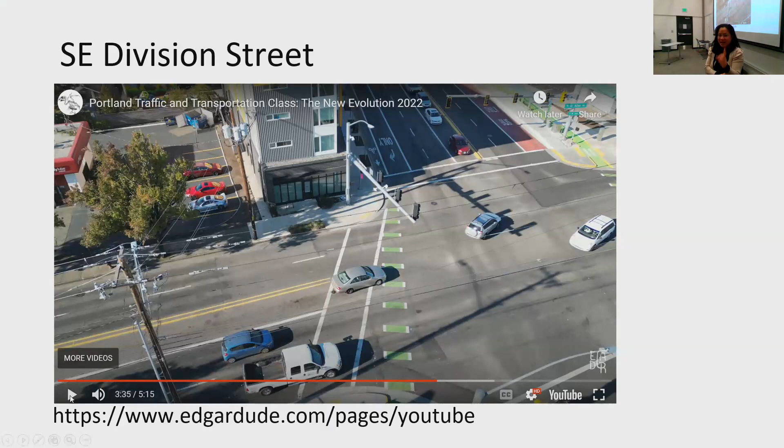If you go to the next one, I want to do a quick scan of a video - can you bring this up? This was a field trip that we did last year out. We did a walk for 82nd Avenue. If you can bring up the video, yeah, and then we'll just show you.

Show you at this point what the vision looks like. That was a very cool day.

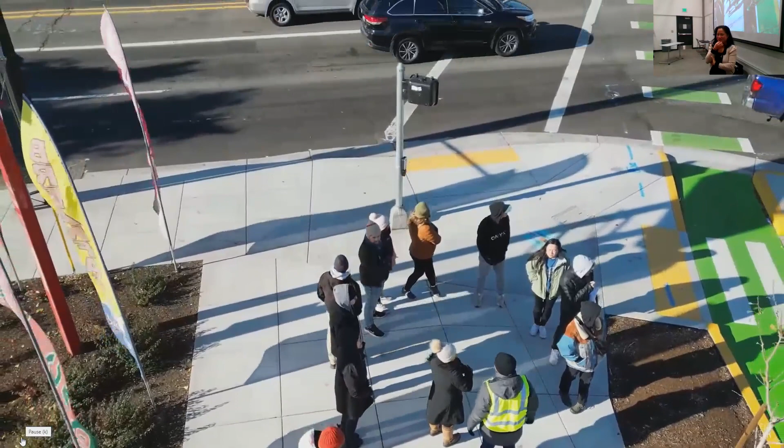So this was one of our students, this was our class last year. I asked for his permission, of course, but this lives on Edgar's website, and I just thought it was really pleasant there.

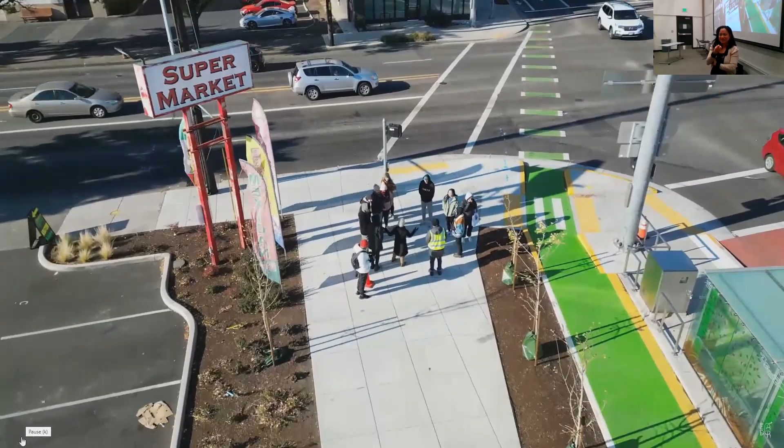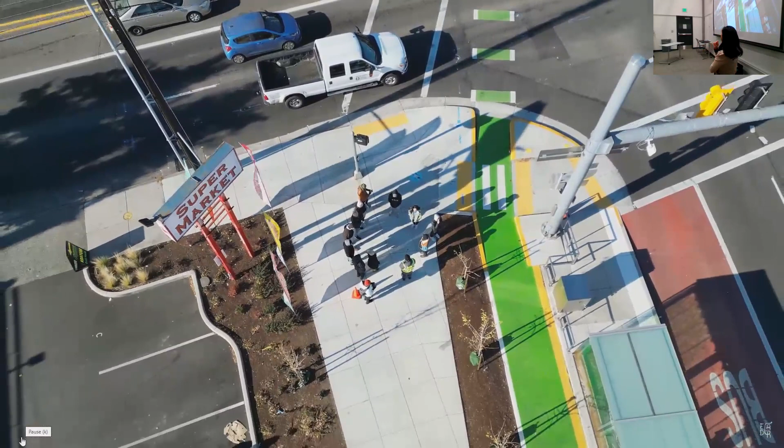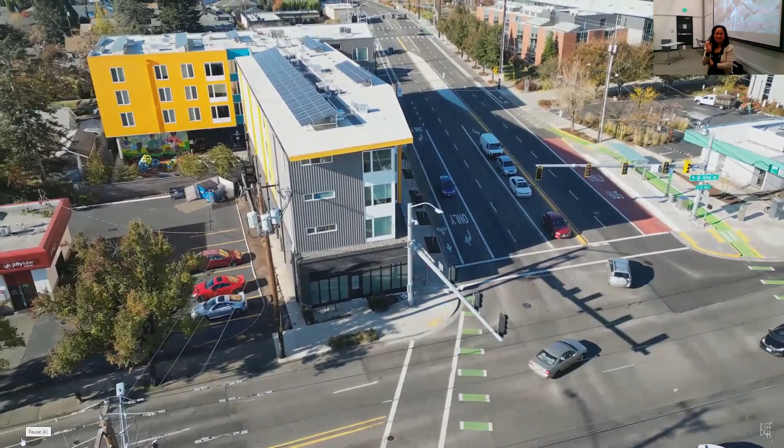So we're not doing that this year, but you got a glimpse of what we did last year on our walk. So with that, I'm gonna bring up my colleague, Marisa, and she's gonna talk about some engineering principles.

Hi, there we go. Yes, thank you. I really admire people who take night classes. I admire it more when I get here because I realize I no longer possess the energy to be out past work night.

Marisa, yes, if you present from here, we have a microphone here, so it'll be easier for people. Do you mind if I stand very close to you? Yeah, please. Okay, great. I'll stand very close to you.

So a little bit about me. I've been a traffic engineer for 8 years, 9 years technically in the field. One of those years I was the equity and inclusion manager for PBOT, which is where I work closely with Lisa Strader, and I'm very happy that we have her and her ADA expertise. People don't often associate ADA and equity together, but in fact, we are one and the same.

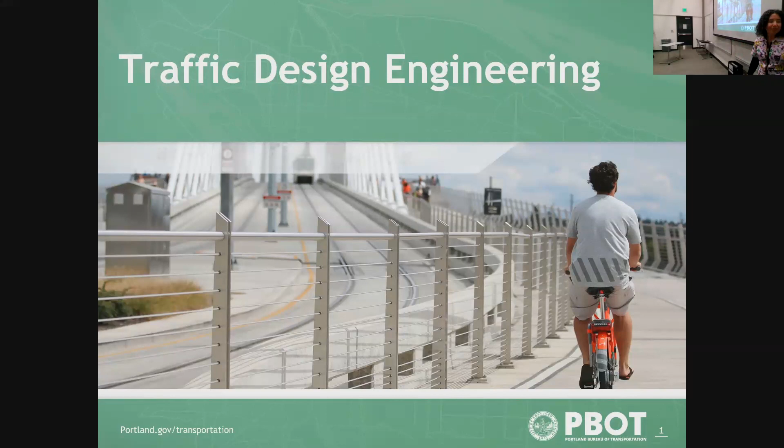All right, so traffic engineering. I chose this really nice part of Southwest, and folks know it - you get to see the highway, you get to see the streetcar that comes through here, we have some beautiful bike lanes that are new so it looks really shiny. This is a nice kind of encapsulation of really the broad variety of things that you work on when you're a traffic engineer at the city of Portland.

So we focus on the safe and efficient movement of people and goods. That's kind of your classic definition of what a traffic engineer does. Traffic design is a subset of traffic engineering in that we literally design the roads, like we design the signals, and we're going to go through those assets here. That's actually what we're going to be talking about.

The cool part about traffic design engineering, I think, is that it is really part psychology and part design engineering. In order to be a really good traffic design engineer, especially at a place like PBOT, you really have to understand what motivates people, how we can gently manipulate them into doing the thing that we want them to do. And then you also really have to have a deep bench of knowledge of all of the levers and tools and guidance and manuals that are available to help you pull those levers.

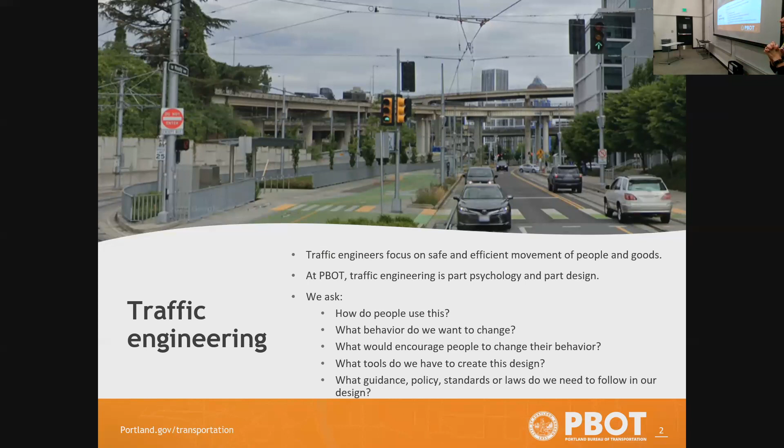All right, next slide. Let's start talking about our assets. One of the things we don't think about a lot is that civil engineering is like 99% invisible to most people by design, right? It's something you should experience every day but not think about.

Pavement markings are kind of the bread and butter of what I do. In the most basic sense, it is the way in which we split our modes. So we delineate, this is where the right turn is, this is where the bike goes, this is where vehicles move through, right? Or take a left. This is where pedestrians go, maybe if we put a pedestrian walkway in the streets.

In a more romanticized way, this is our basic tool we have for helping people to make the right decision at any given intersection or any given segment of road.

And we do that through a variety of ways, like our crosswalks, our green paint, right? But also some of the real basic things are the way that we dash our streets, which will indicate to you whether or not you can merge, whether or not you can pass, if there's a bike lane present, right? So these are all the subtle but basic tools of what traffic design looks like at the City of Portland.

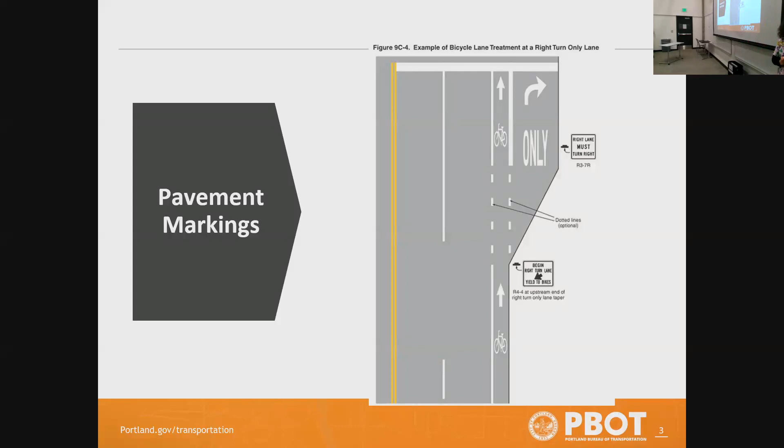The second highest-use thing that we do everywhere is permanent traffic control signs, not to be confused with temporary traffic control signs—those are the things we put up during construction. They're often orange and say bikes in roadway, or construction ahead, or whatever they might say for that particular use.

We have some really common permanent traffic control signs like your stop signs and yield signs, and some more uncommon traffic signs like no turn on red from this lane, which we may only use in one really specific circumstance. But because of that very specific circumstance, the Manual on Uniform Traffic Control Devices, which is the Bible of signals, street lighting, pavement markings, and traffic control signs, has put it in there under R10-11D.

So any state you go in, that's what it's going to be—this is our federal guidance. It's likely for those places where you have a dual right turn, and maybe in the middle lane we don't want you to take a right from there onward, right? So some very specific circumstance came up, and it was common enough across states that they decided to make a federal rule.

Here in PBOT, we have a ton of signs that are just ours, which you will know if you've operated a vehicle of any type in the City of Portland and have operated it anywhere else. We have a really specific way that we like to do our transportation design. Some signs that have ended up in the MUTCD came from things PBOT has piloted, and some of our signs are not in the MUTCD, and that is great too—that's again the Manual on Uniform Traffic Control Devices, so we say MUTCD.

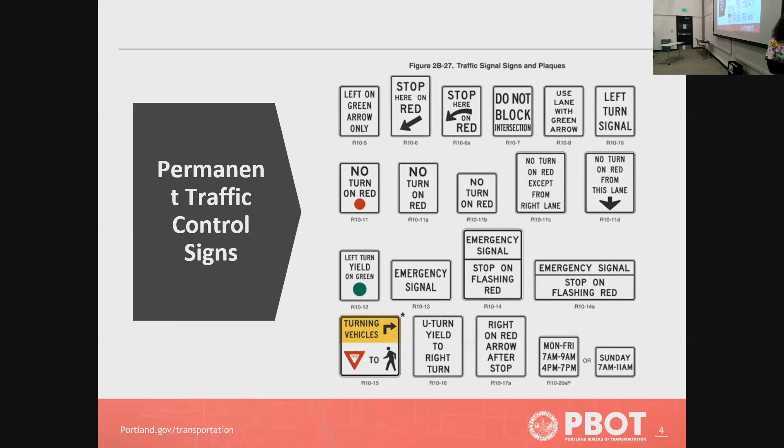All right, it's a big green net. It is, I haven't seen a hard copy of that in years. Does that only cover signals? Is it like another manual for road widths and such? It covers—yes, and yes to both of those things.

So it covers all the things that I mentioned. I call what I do like the accessories and makeup of the road, which is a very feminine metaphor now that I'm saying it. But the paint is like the makeup, and the accessories are like the signs and the signals—so it covers all of that, the MUTCD.

So traffic control devices are how we sort of categorize those things. But we also have AASHTO, the American Association of State Highway Transportation Officials, I believe. AASHTO has its own set of guidelines, and then we have a highway capacity manual too. The manuals are obscene, the number of manuals and guidance. Most of the education in becoming a traffic engineer is just understanding what manual you need when, and that can be really complicated, unfortunately. But wouldn't be a bureaucratic organization otherwise.

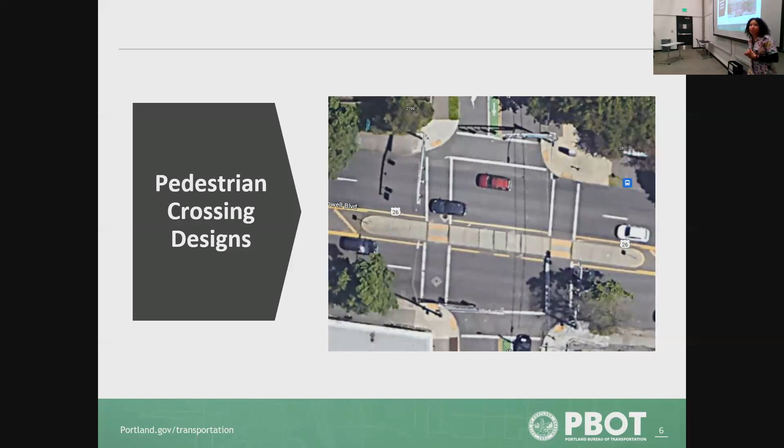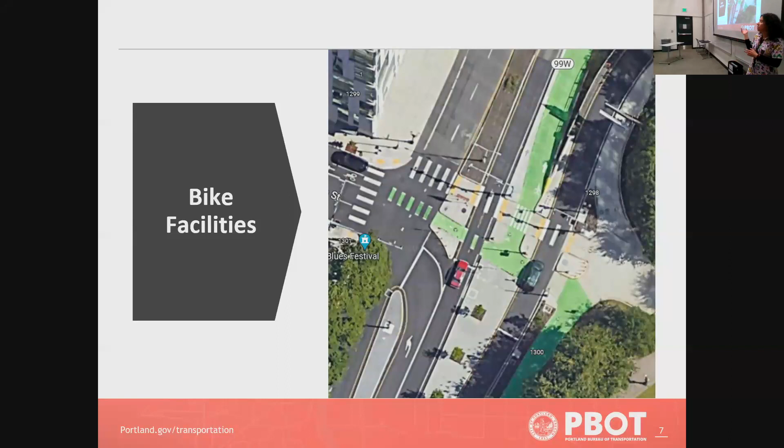We have bike signals through here, and a median as well for bikes to use. And then my last one is a transit island station, and I feel like Lisa's probably got some thoughts. I know she does, because I just heard my colleague say, Lisa's got some thoughts. That's why she's here.

This is one of the newer things we're doing. We spend a lot of time talking about bikes and pedestrians, but if we really want to reduce vehicle miles traveled, we need to focus on transit. That has to be a priority. One way we can do that from the infrastructure side, not just as TriMet owning the transit agency, is to build better infrastructure for transit users.

This is an attempt at that. I don't know if we've nailed it—I know we haven't nailed down the design. I just learned that earlier. So we have our beautiful green, and these are the crosswalk markings I was talking about before.

This is really interesting to look at, because we're talking about mode conflicts, which you don't always think about—like a crosswalk through a bike lane. But that's a real conflict, because that can be a pretty dicey situation for a pedestrian if a bike's moving at a certain speed. Even bicycles have to look out. We sometimes do a shark's teeth pattern as well, which is another kind of symbolic cue to be aware of another mode crossing.

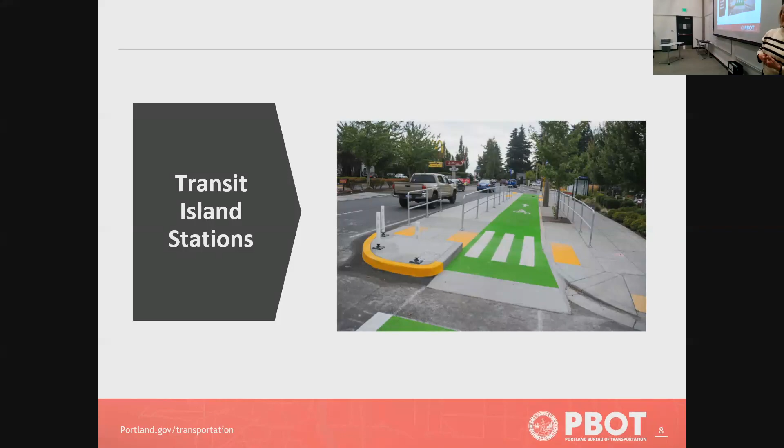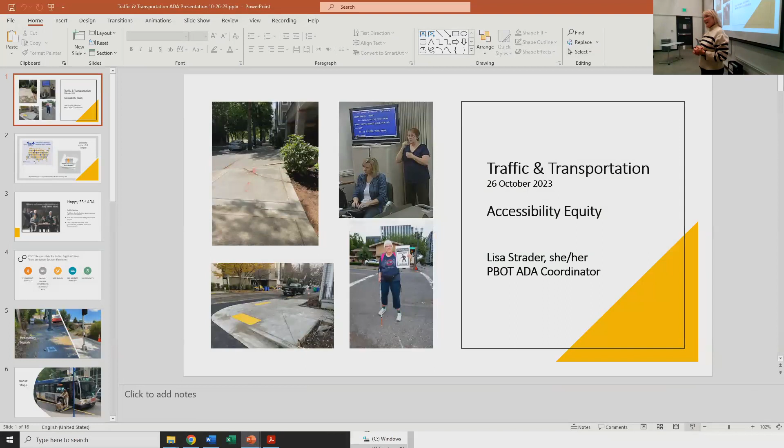Do you all track bike collisions? To the extent that they're reported. My understanding is that these are police reports, not insurance reports, and not self-reported. So it'll be a much more slim report compared to other states that have insurance claims backing it up. It depends on the severity of the injury, just like most crashes. We don't actually get every crash that happens.

Is it a police report or a medical exam report? It's a police report, yeah. It's pretty common on the West Coast that that's the case, while the East Coast will involve money a little bit more. So if you file an insurance claim, you basically have to append it to a police report if there's one. In California and Washington, the laws around this are much crazier, so you do get more reports there. In Oregon, not so much, so we don't really.

That's okay. Hi, my name is Lisa Strader. I use she/her pronouns. I am PBOT's Americans with Disabilities Coordinator. I've been a certified ADA coordinator for about 3.5 years. Before PBOT, I was at ODOT, the Oregon Department of Transportation's ADA program manager, for 4 or 5 years. I lived up here and worked in Salem, driving there every day, so it's nice to live and work in the same city now.

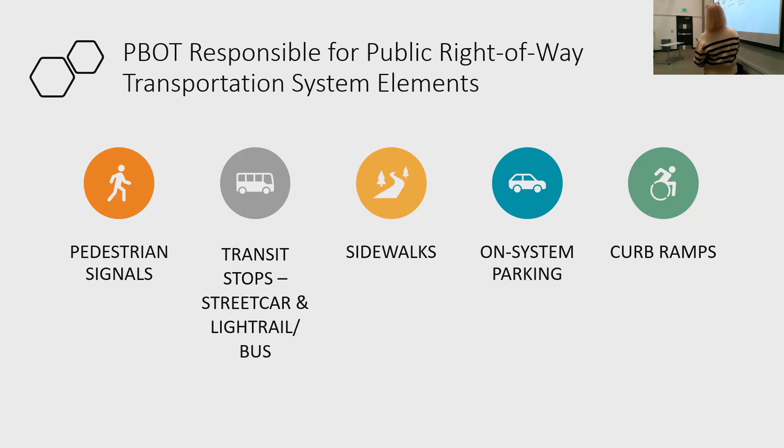Thuy talked about the division transit project, and Marisa talked about capital projects. So a lot of the work to make our elements that are required to be accessible under the ADA that way happens during projects. I mean, they all happen during some kind of a project, but we have a requirement under the ADA to make everything compliant. We're supposed to have done it decades ago.

And so, since we're not there yet, and because we're a Title II agency, we have to have a transition plan. So we'll get some of the work done when a project, like the ones that were mentioned, triggers a requirement. So when we pave through an area, we pave a whole street, we have to make all the ramps that are along that route compliant.

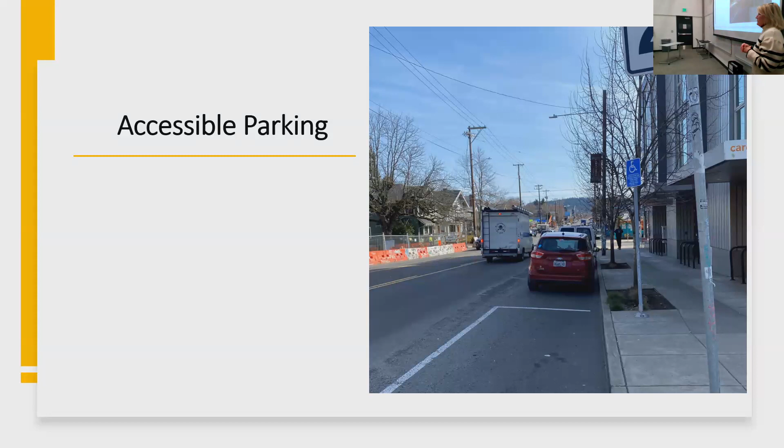So we, like really a lot of cities, which is not an excuse, put the responsibility for sidewalks on adjacent property owners. We have a program that says we're supposed to be enforcing that, and we're probably not doing that as much and as well as we should. So we have a lot of locations like this. We occasionally fix these, or we have a project where we're adding a stretch of sidewalk that doesn't exist, which, by the way, is not a requirement of ADA.

We don't build sidewalks where there aren't any. There's a lot of good reasons to add sidewalks where there aren't sidewalks, and accessibility is a big one, but it's not an ADA requirement. But where we have sidewalks, they're supposed to be accessible.

Are property owners then also allowed to cut down those trees whose roots are breaking the sidewalk? No, that was split—sometimes, but not always, and not automatically. Our urban forestry does evaluate trees like this one, and sometimes we do the best we can to both keep our tree canopy and make the sidewalk accessible.

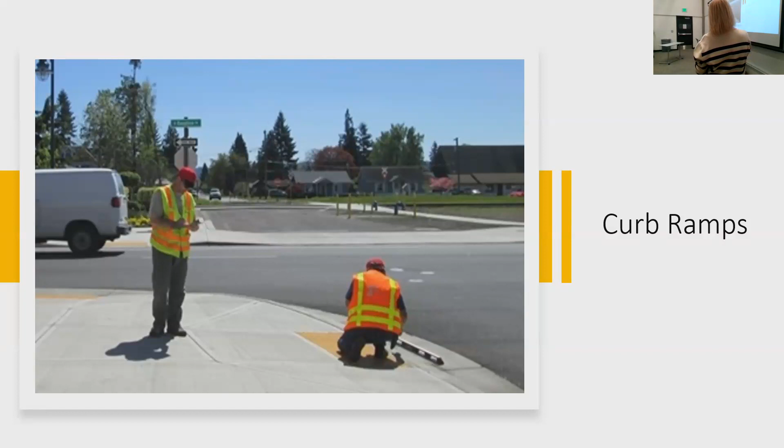And then curb ramps. This is an image in Beaverton—I know it's an ODOT facility because this came with me from ODOT—but this was just built. These two staff in safety vests with a level are out there measuring this beautiful new corner. It looks great, very usable. And then if you'll go forward again, but this isn't compliant.

So another thing that a lot of people talk about is how hard it is to build compliant curb ramps. Why do they cost so much? Why does it matter that they're so compliant? Why do all these measurements matter? Because if you remember the previous image, that looked really good, right? So for a lot of people, this corner is going to seem great—but it was a super embarrassing moment for me once, talking to an audience. You should always know your audience.

I was talking to an organization that supports people with disabilities, several of whom were in the room. I described a previous image as curb ramps that work as intended. A woman who uses a walker told me this is exactly the kind of situation where she came up to it thinking it was compliant - it looked really good. But because there was a 2.5% difference between one side and the other, when she put her walker down, she expected it to land flat, and it didn't. She fell over. So I was told these can be worse than ones that look really bad, because at least then you're prepared and cautious. These can be more problematic, and that's one reason it's so important to get them exactly right, because they look really good.

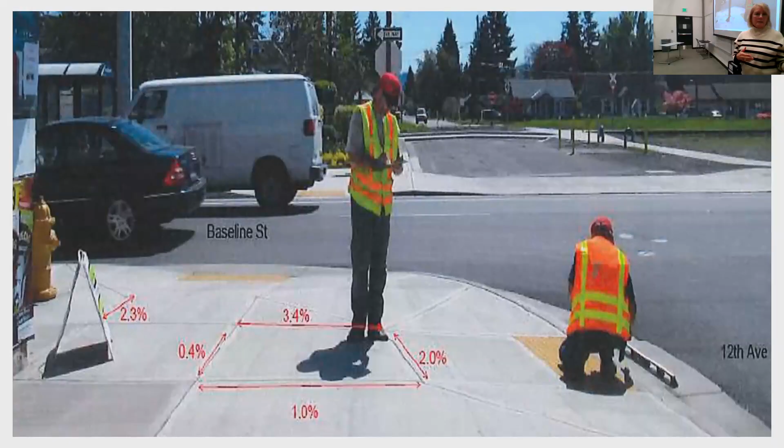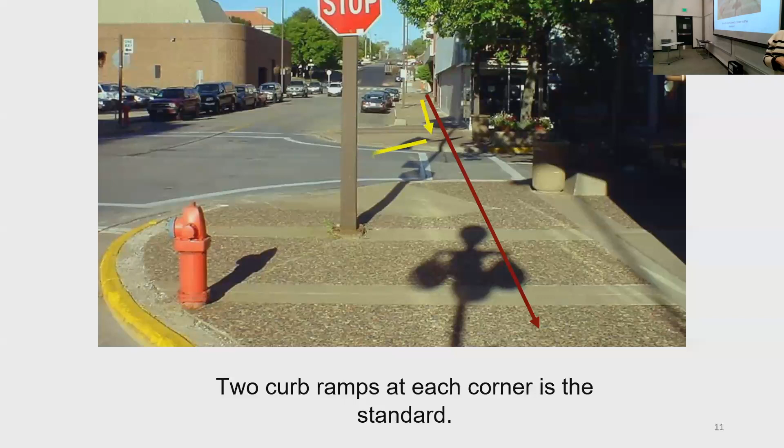The other thing we talked about, and I pointed out in the photo, is that currently PBOT standard is 2 curb ramps at each corner. This is a picture of diagonal curb ramps, so if you just keep going forward, I can walk down those curbs and straight along the street and just keep going on my way. But if a wheelchair user is with me, this is their route.

So, one, it's a lot longer, it's not equitable. It also puts them out in traffic. A lot of times people who use mobility devices are much lower profile, and especially if a driver sees me walking along and doesn't even stop to think about the fact that I could have a child next to me, or a mobility device user next to me, they wouldn't necessarily think about it - they think they've seen the pedestrian.

And so this is one of the reasons that we now build 2 curb ramps. We do have a right to build 1 - there are technical circumstances where there just isn't room for 2. There could be a building that's too close to the corner, there could be drainage that's really problematic to move, or signal poles. Technically, if it's a utility pole, not a signal pole, it shouldn't be in the way, but sometimes there are utility poles that are in the way. Technically, you can ask those to move, but a lot of times that doesn't happen.

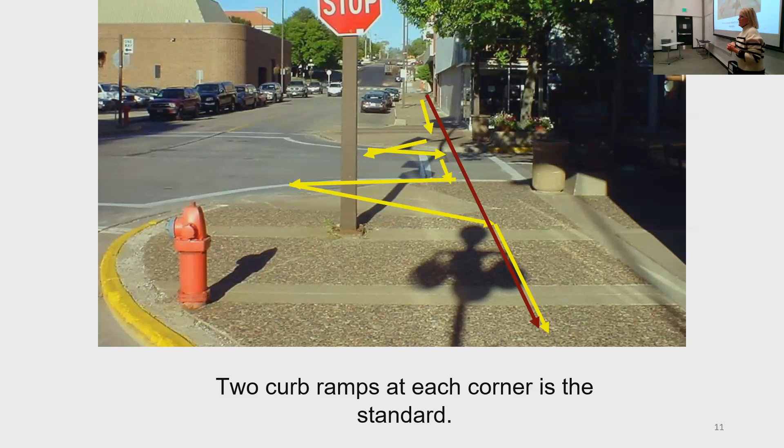This was early in the pandemic. We have guidelines now that are much more robust, and over time hopefully all of those things will change, but that's an example of a program.

Services are like leaf collection, so we have to be sure we've communicated effectively to everybody about the fact that they need to move their car off the street. Activities, so meetings - you may have noticed I'm telling you more about my slides than maybe you feel I need to, because I think you can all see them, but especially in a big room of people, you should never assume that everybody there experiences the presentation the same way I do.

So I describe my slides if I'm doing a public presentation on the work that I do, or a presentation to a big group. If I'm in the office with 5 coworkers that I know can see them the same way I can, I don't do that. But also, for meetings, it's not just getting in the building - if I was handing out things, can everybody know what I've given them?

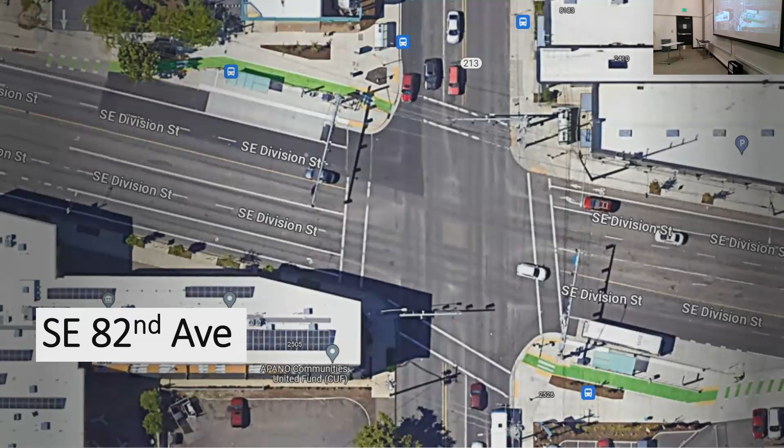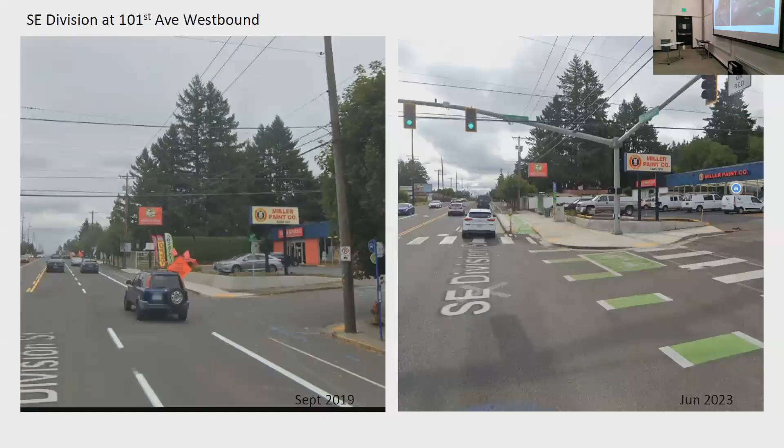Sorry, I'm getting a bunch of ink on my hands. The bus stop was also extended out. It's fine. The bus stop didn't have a shelter beforehand, so a shelter was added. Bollards were added as well. I learned that the speed was lowered from 35 to 30. And they repaved the road generally, which is good.

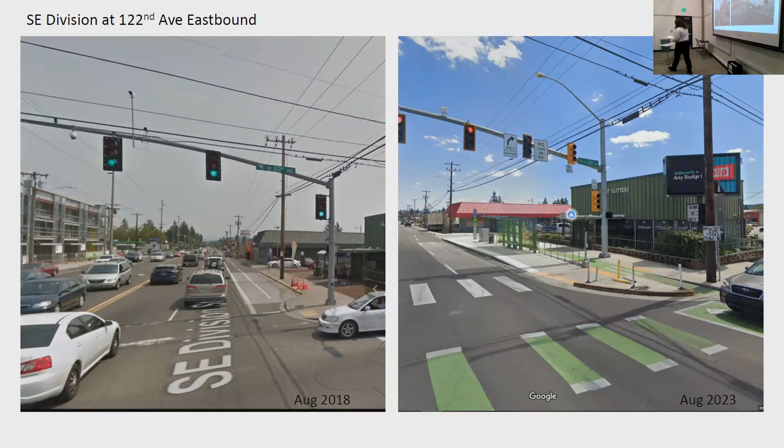So let me introduce you to one of my least favorite intersections in the city. You have a half a mile of surface area parking lots this way and this way. So who would ever cross here? Which poor unfortunate person is going to cross the street?

I have. So apparently a lot of people live there. They're building a giant, beautiful park - it's got a theater, all sorts of cool things. Good luck getting there, right?

So you have to pull out of your parking spot here. Pretend you can exit on this road, turn and go park again, get like a soda, and then leave and go park again. This is the sort of fabric of this area.

A lot of the time, the fabric here is that people in vehicles feel entitled to cross multiple lanes and go into all the different parking lots they want. So the first improvement is along here - there's a solid barrier so you can't turn left at 60 miles an hour into Fred Meyer's.

Okay, but you probably can do it from this side. The same thing - there's a 7-Eleven at one of the other intersections, and you can't just willy-nilly cross in. So that's a huge improvement.

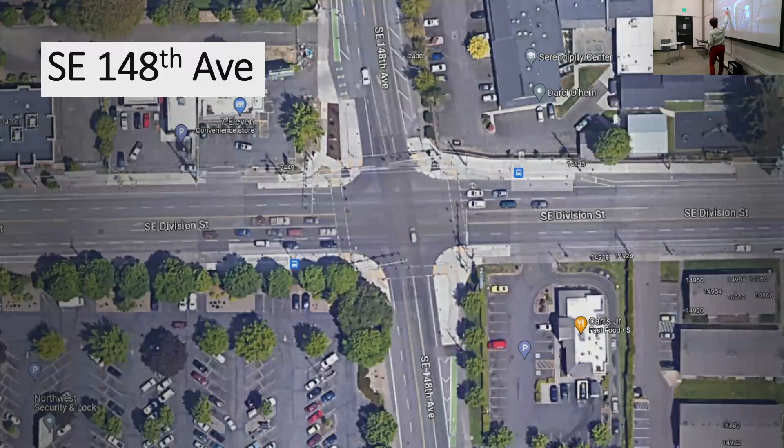It's clear that people who live in this area are living at odds with people who pass through. If you're zipping on by to the next town, you want to go as fast as you can, maybe stop at Fred Meyer's and keep going. And it seems like the people who live here are trying to access the park across the street. So that's the biggest, most notable improvement.

If you're taking transit, the only improvement is that crossing the street is a little easier now, but there isn't really any dedicated transit at this intersection. For mobility for people on bikes, cars haven't lost a lane, they just have to go a little slower to turn and can't cut across the avenue to park. If you're disabled, you can seek refuge without going up a ramp - but that's as far as we got.